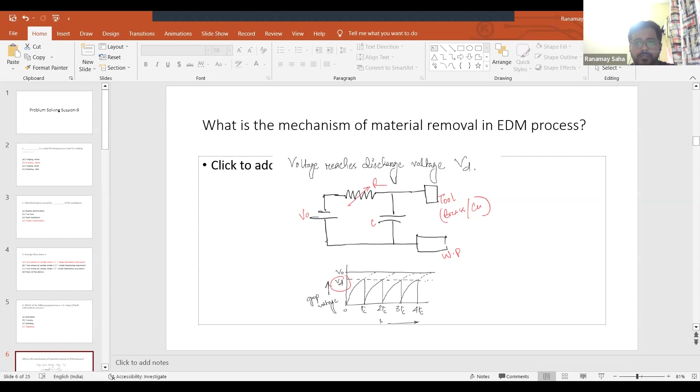Okay. So let's start with today's session. It is problem solving session 9. We are nearing the end of this course actually. Today we'll be discussing assignment questions from last week, that is your assignment number 9. After that, we'll be taking up some of the concepts and some related problems from the current week content, that is your electro discharge machining process.

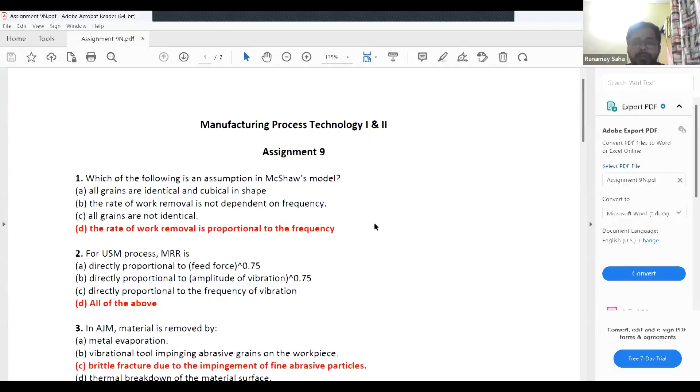I hope you have gone through this topic and all the videos of the current week. If so, then let's first start with the assignment questions. Okay. So this was your last week assignment. I hope you could have done all those questions easily, and if you had any doubts, I hope that gets clarified now.

To start with, the first question was which of the following is an assumption in the McShaw model? During USM, the ultrasonic machining process, we make some assumptions before we derive the MRR. As per McShaw's model, we assume that all the grains are identical and spherical in shape. They are not cubical, so the first option becomes wrong.

The second option said the rate of work removal is not dependent on frequency. But actually the rate of work removal is dependent on frequency. If you have noticed, you have three things on which the MRR is dependent: the volume of material removed, the frequency, and the number of particles impinging. So the second option is also wrong.

And all the grains are not identical is not an assumption; all the grains are identical, that is assumed. So the fourth option is the correct one: the rate of work removal is proportional to frequency, right?

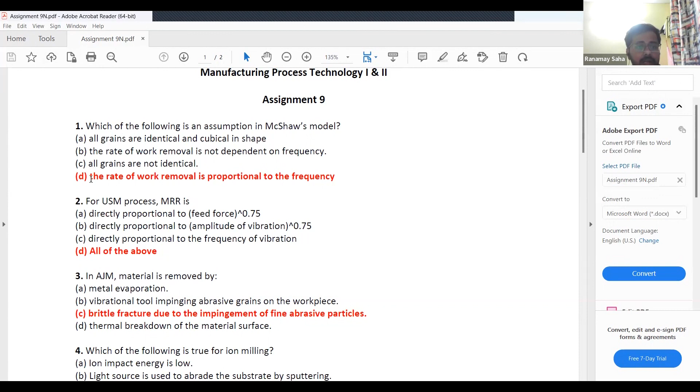The second question asked about the proportionality of MRR for the USM process. From the final expression, you can see that it is directly proportional to the feed force raised to the power 3/4, that is 0.75. Similarly, it was directly proportional to the amplitude with the same power, 0.75. And it was directly proportional to the frequency of vibration, as we discussed above. So all these options were correct in this question.

Then in AJM, abrasive jet machining, material is removed due to the impinging action of the abrasives, right? So metal evaporation is not the answer. The abrasive grains impinging on the workpiece is the cause, and the effect is brittle fracture due to that impingement. So the third option is correct here, and thermal breakdown doesn't happen in abrasive jet machining.

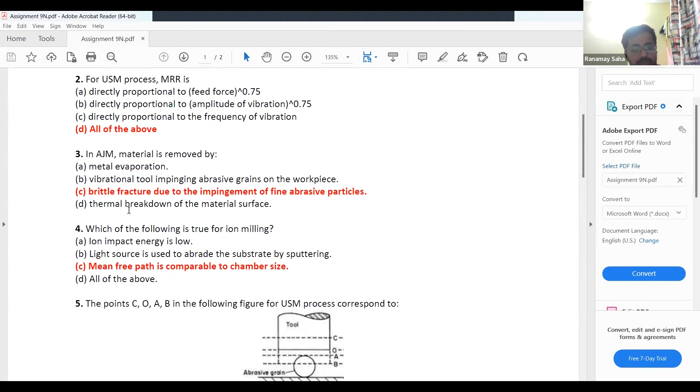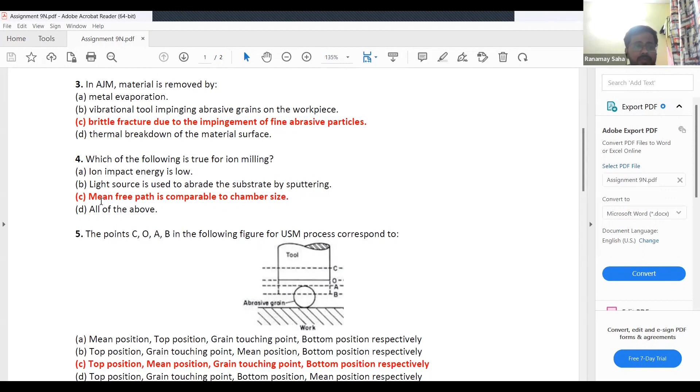The next question was, which of the following is true for ion milling? In ion milling, the impact energy happens to be high, isn't it? The third option, the mean free path is comparable to chamber size, is the correct option. A light source is not used; actually the ion energy is used to abrade the substrate, so the second option is wrong. So option C becomes your correct one in the case of ion milling.

The fifth question was about ultrasonic machining. You just had to mark the points C, O, A, B with respect to the positions of the tool and the grain. As the tool starts motion, C is your initial or top position. A is when the tool touches the grain, and B is how much the tool has penetrated into the grain. O is your mean position. So option C follows. I hope that's clear.

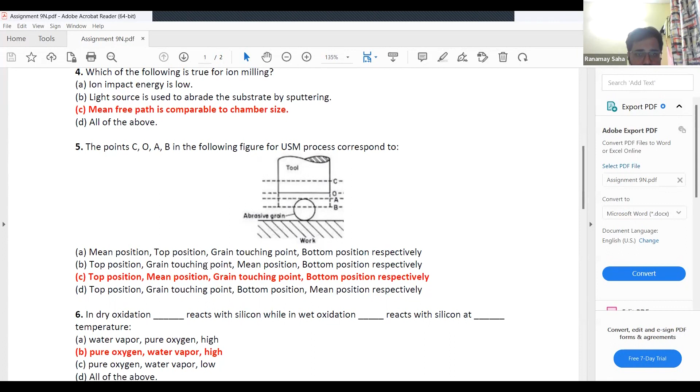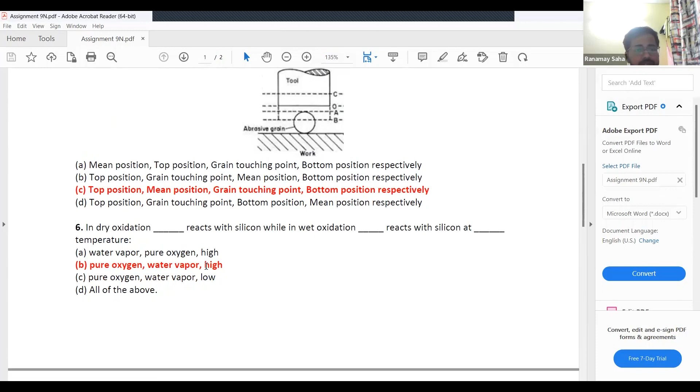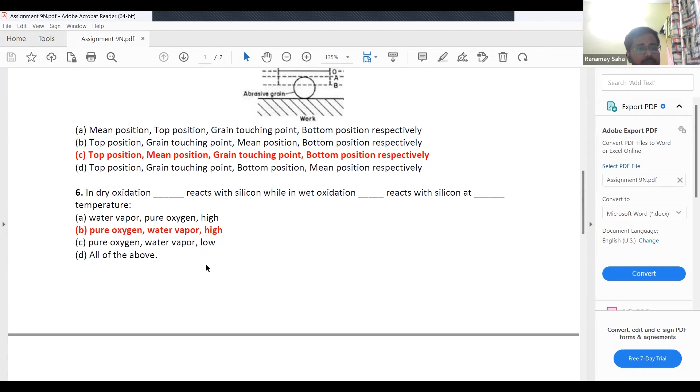Okay, so the sixth question asked: in dry oxidation, what reacts with silicon, while in wet oxidation, what reacts with silicon, and at what temperature? So, in dry oxidation, pure oxygen reacts, and in wet oxidation, water vapor actually reacts, and the temperature is, of course, high. So option B follows.

And then the next question was for the USM process. What should be the tool property? Ductile, brittle, hard or tough, or soft? As the tool is subjected to an oscillatory motion, a to and fro motion, and the abrasive grains are hard, the tool should be tough. Okay, the tool should be tough and ductile at the same time.

So the next question was in AJM. How does MRR vary with respect to mixing ratio? Now, the mixing ratio of abrasives and your air. We had discussed last session how the MRR varied, isn't it? So ideally, it should have gone on increasing, but that doesn't happen because of crushing of your grains, and it initially increases and then decreases after a particular optimal point.

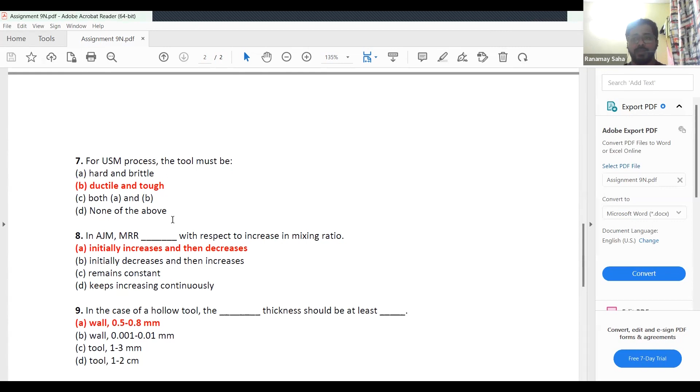And then in case of a hollow tool, what should be the wall thickness? If you take up the options, you can see that option A only matches; the other thicknesses given are not the correct ones. So the wall thickness should be at least 0.5 to 0.8 millimeters.

And the last question was, which of the following is not used as an abrasive in the AJM process? Silicon carbide and aluminum oxide are of course used. Sapphire is never used in the AJM process as an abrasive material, because that would again add to your cost. So why should we go for that? So option B, sapphire, is not used in the AJM process. Okay. So I hope you don't have any doubt in these questions.

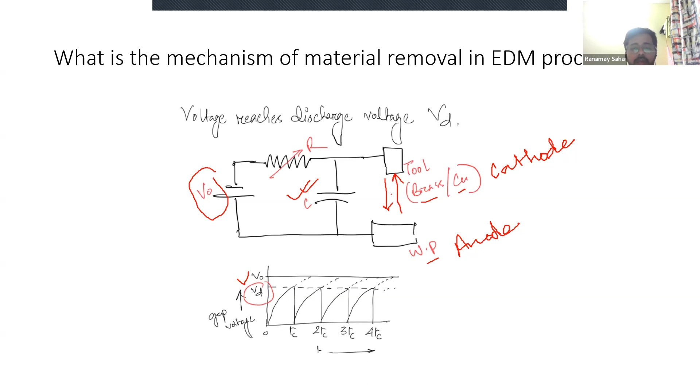Now, when the discharge voltage is reached, the electrons start to accelerate toward your anode. The cathode is connected to the negative terminal, so it is full of negatively charged electrons. Electrons start traveling towards your anode, and ions start traveling towards your tool or cathode. When the electrons start traveling, they start colliding with other molecules of the dielectric medium. The dielectric can be kerosene, or some hydrocarbon like petroleum oil.

Now, these are full of their own molecules. As the electron travels towards the anode, it collides with the molecules of the dielectric medium and breaks them down into electrons and ions again. So what results is the generation of an ionized column of dielectric fluid molecules.

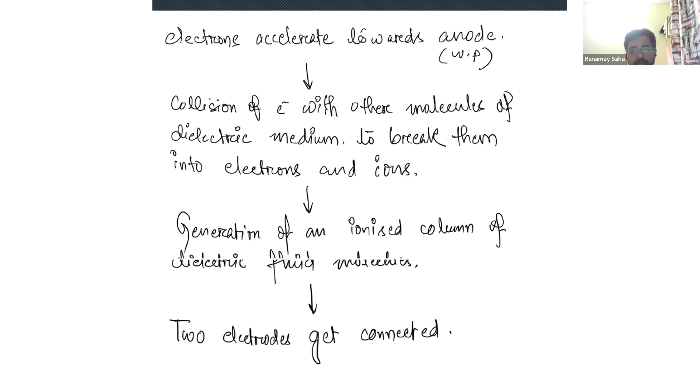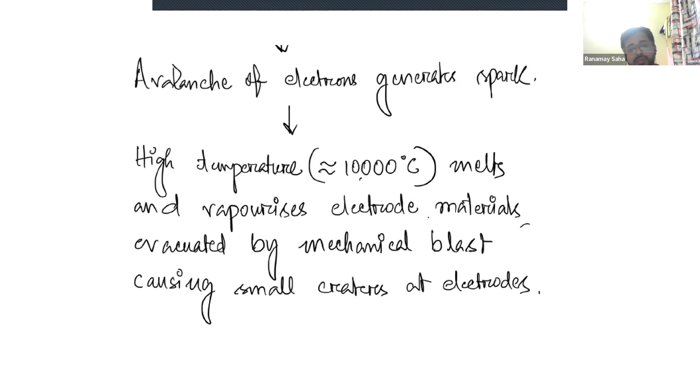A huge quantity of electrons traveling at a fast speed towards the anode from the cathode, and that generates a spark. Now, the spark is characterized by high temperature, maybe in the order of 8,000 to 12,000 degrees centigrade even. And this high temperature then vaporizes your electrode materials, mostly your anode, the workpiece. So that starts by creation of small craters at the electrodes.

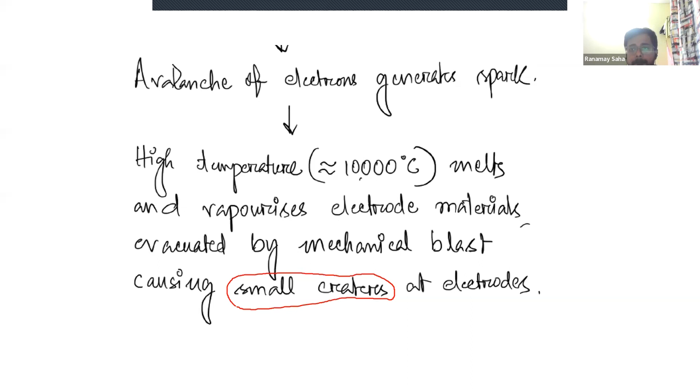And that is how your workpiece gets eroded and material removal takes place to get the desired shape of the material. I hope that is clear. So if that is clear, then let me ask one question: why is it that material removal is more from anode than your cathode?

So actually the fact is that the momentum of electrons, the stream or avalanche of electrons, is far higher than that of the ions. So subsequently, when a higher momentum of electrons impinges on your anode, the material removal is consequently higher from that electrode. That is one cause. There are more causes.

One is pyrolysis of dielectric fluid. The pyrolysis actually gives rise to a thin layer of carbon on the cathode, and that is called pyrolytic carbon. Because of that, a protective layer forms on the cathode. Pyrolysis is the process of thermal decomposition of materials at elevated temperatures, often in an inert atmosphere. So here it is actually your dielectric fluid, which you use during your EDM process.

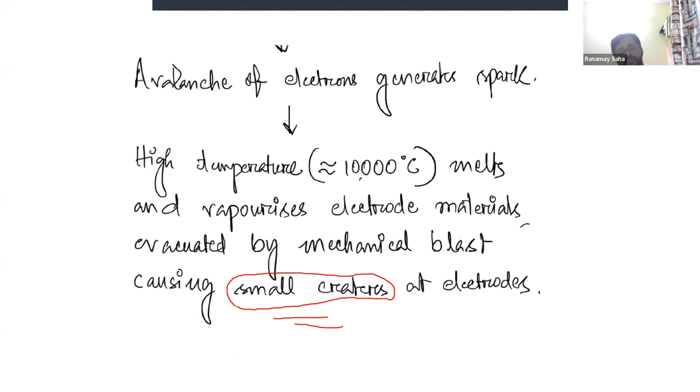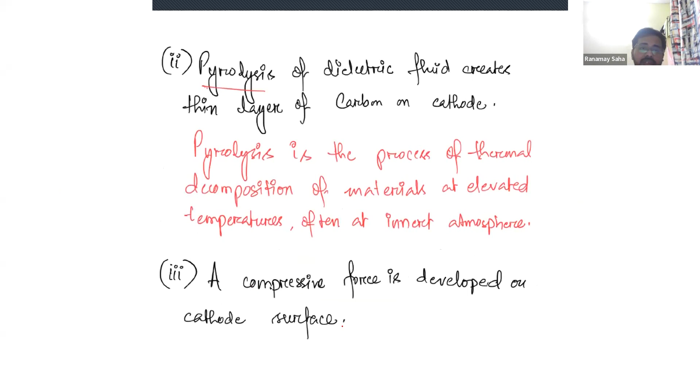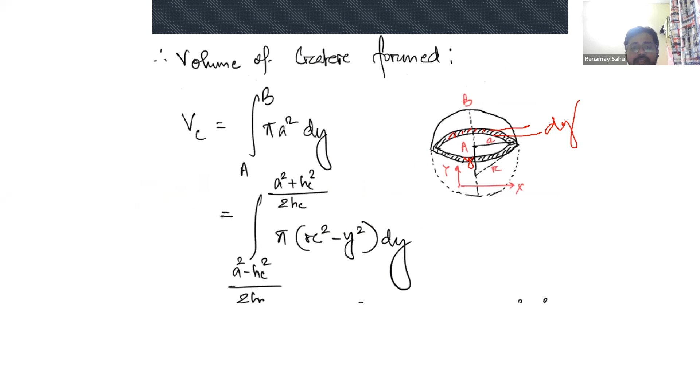So this is the step of integration, the intermediate step being shown. You find out that your Vc is actually pi by 6 of h, where h is your crater depth and a is your crater radius. So the one variable, which is the radius of the total sphere out of which the crater is a part, is eliminated. So now, if you can find out the crater depth and radius, you can find out the volume of material removed out of the crater, assuming it is a spherical one.

And if that is found, I hope somebody's mic is on. If you can switch it off.

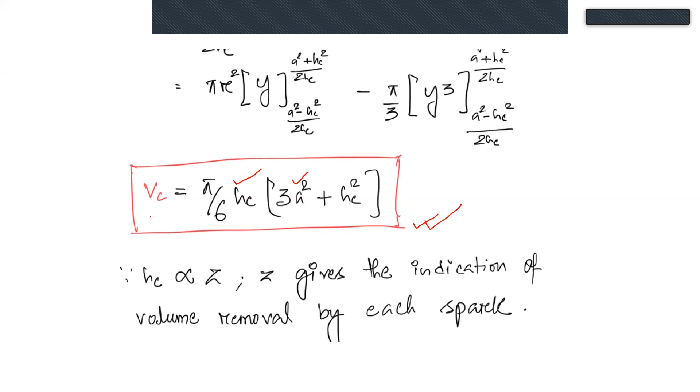So the crater height is proportional to z. Let z be the actual depth of the crater formed, and it is an instantaneous height. We have assumed it, and the total depth is z. So h is proportional to z; it is in the same direction, isn't it? If this be your crater, this be your hc. Whatever dimension of crater being formed, z being the total depth, z is an indication of material removal. So very simple.

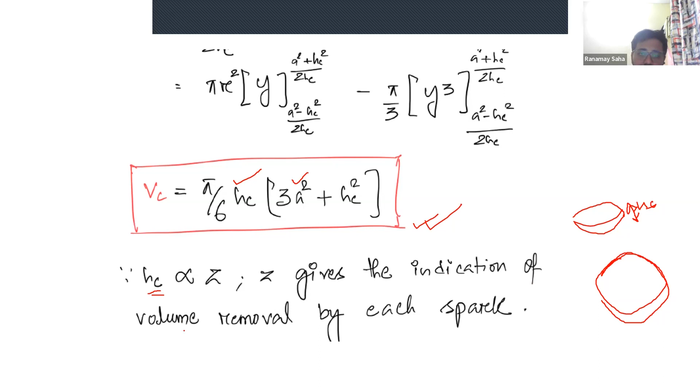So proceeding, what we see here is one empirical relation which has been found experimentally: hc is proportional to some constant k1 and w, which is your spark energy in joule. The unit of depth here is centimeters. And again, a, the radius of your crater, is constant k2 and w, your spark energy, raised to the power 1/3, divided by 2, half of that, gives your a.

Now you just plug in the empirical values of hc, hc, and twice of a in your crater volume formula which has been derived right now, to find out the total crater volume in terms of your empirical constants and your spark energy w: pi by 6 k1 into (3/4 k2² plus k1²), multiplied by w.

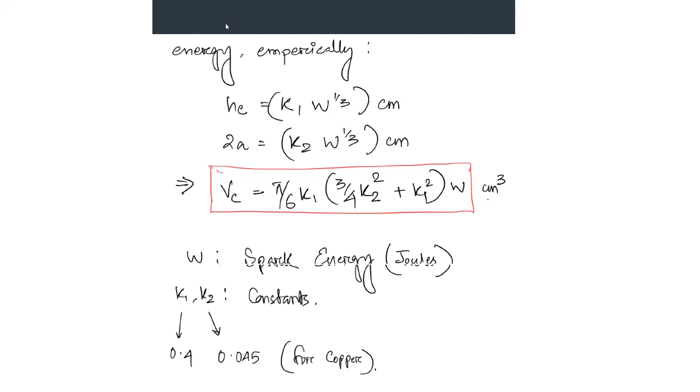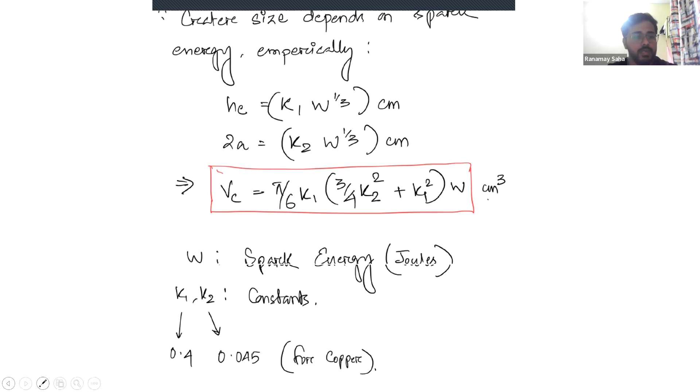Okay, so let's move ahead. We have a numerical now to solve, and this is simply based on your RC relaxation circuit during the EDM process. This is an RC type generator, the maximum charging voltage is 80 volts, and the charging capacitor is 100 microfarad. Now you have to determine the spark energy.

So it is pretty simple. Here this term becomes zero because your discharge time TD is almost equal to zero. So the spark energy becomes half C VD². Your capacitance value C is given, and your voltage VD, or VC here, 80 volts, is given. So you just plug in the values and find out the energy is 0.32 joule. Hope that's clear.

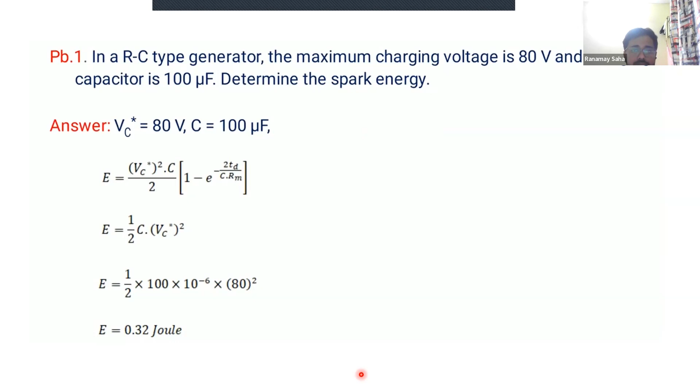Okay, so let's proceed. This is one more question. Here you can see that for an RC type generator to get maximum power dissipation during charging, VC is given as 0.716 V naught, or we have derived in your class that VC or VD is almost equal to 72% of V naught. Your V naught is your supply voltage, right?

Now, if that is given, you have to determine the idle time, with R as 10 ohms and capacitance as 200 µF. Okay. So you just plug into the equations. The equation of TC is given by RC natural log of V naught by V naught minus VD, as we see here. Okay, that's the same thing, and this has just been rearranged to look like that.

So you just plug in the values. Only TC is unknown in this equation. You know the capacitance value as 200 microfarads, you know the resistance value as 10 ohms, and it is given that your VC or VD here is 0.72 or 72% of V naught. You just plug in the values and find your TC as 2517.56 microseconds, or you can say 2.517 milliseconds. Okay.

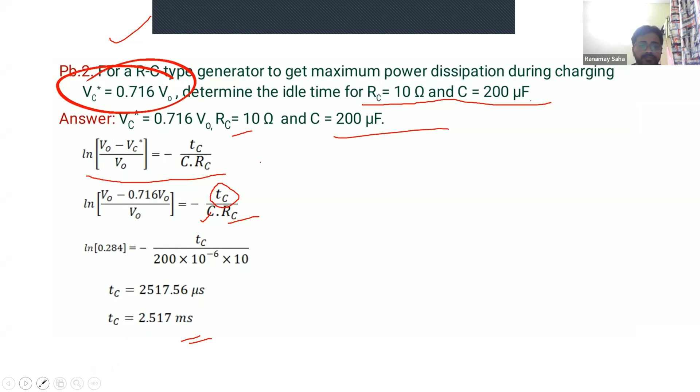Okay, let's proceed to the next question. A resistance capacitance relaxation circuit is used in an EDM process. The discharge voltage is given as 100 volts at a spark cycle time of 25 microseconds. The average power input is given as 1 kilowatt. The capacitance in the circuit has to be found. This question came in GATE set 2, 2015, and it is a pretty simple question. If you have got the earlier two questions, then it is also of that kind.

So again, this part is 0, so e to the power 0 is 1, and then the spark energy is just half C V squared. So you just plug in the values. C has to be found, the power input is given as 1 kilowatt, and voltage is given as 100 volts.

Now the spark cycle time is 25 microseconds, so the total energy then becomes this many joules. You know the unit of power is joule per second. So to find the total energy, you multiply power by time, plug the value into this equation, and solving it you find that your capacitance is 5 microfarads.

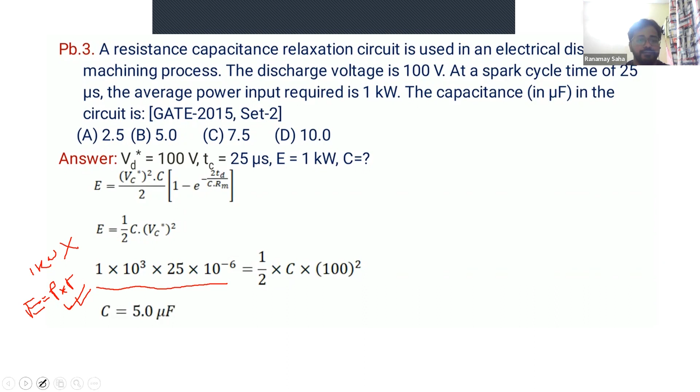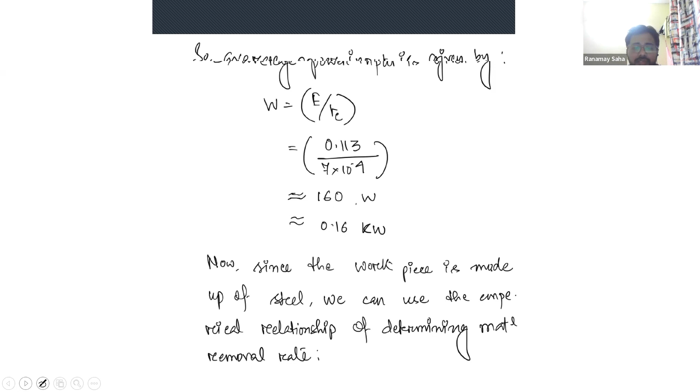Now, proceeding, you have to find out the average power input, which we just mentioned. That is given by your energy per unit cycle time. You just divide that, and you find that your average power input is almost equal to 0.16 kilowatts. And now, since the workpiece is made up of steel, we can use the empirical relationship for determining MRR. That relationship is 27.4 into average power input in kilowatts.

You should remember that this W is always in kilowatts. You should not plug in the value in watts. Okay? So you just plug in the average power input, which we found as 0.16 kilowatts, raised to the power 1.54, and we find the Q as 1.63 cubic millimeters per minute.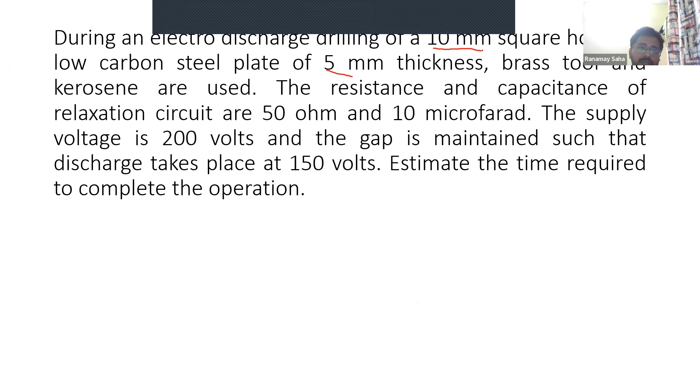For the total volume of material, you have been given the plate dimension as 5 millimeter thickness, and a square hole has to be made, a 10 mm side square hole. So let us assume that is equal to the net volume to be removed. So you have 10 cross 10 cross 5 as the net volume to be removed, and that gives your total volume to be removed as 500 cubic millimeters.

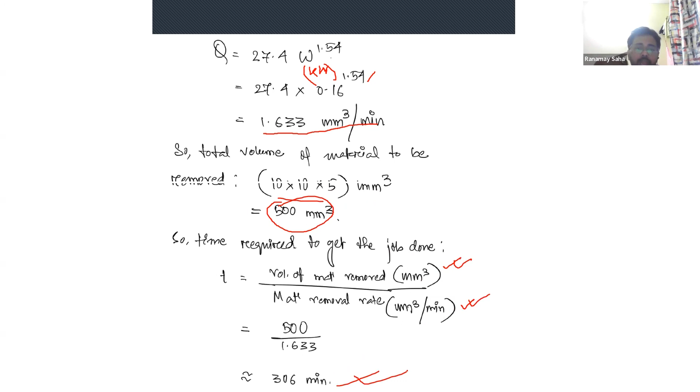Now you just divide your total volume in cubic millimeters by material removal rate in cubic millimeters per minute to get the total time as almost equal to 306 minutes. So that answers your question. I hope that's clear to you all. If you have any doubts regarding this question, please put them up.

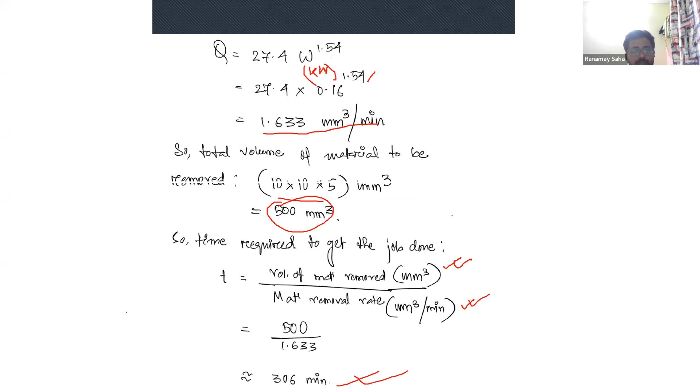So it is clear to everyone, right? No doubts, no questions. So then, this is probably the last topic of today's session.

It says, what is the role of cavitation in EDM? Now, first of all, do you know what cavitation actually is? Cavitation is a phenomenon which happens when the pressure falls much lower. Let's suppose in the case of turbofans, a jet engine, or a propeller. What happens is it's rotating at very high speeds, and when it rotates at very high speeds, often the pressure falls much below, often below atmospheric pressure.

And as a result, in the fluid it is in touch with, maybe air, maybe water in the case of a propeller, some bubbles get formed, because it starts boiling at much lower pressures, at lower temperatures itself. And when these bubbles burst, it erodes the material it is in touch with. So that particular phenomenon is called cavitation.